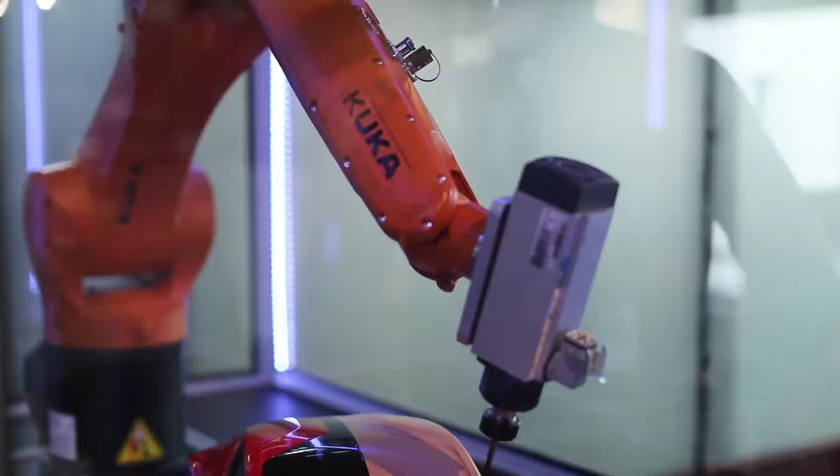Almost all design and construction nowadays is digital. The application of digital design tools can bring many benefits to the development of a project. Digital tools include both machinery, for example CNC technologies, and software such as CAD, 3D visualization and BIM tools. Building information modelling is a key tool for digital design and one we will focus on in this video.

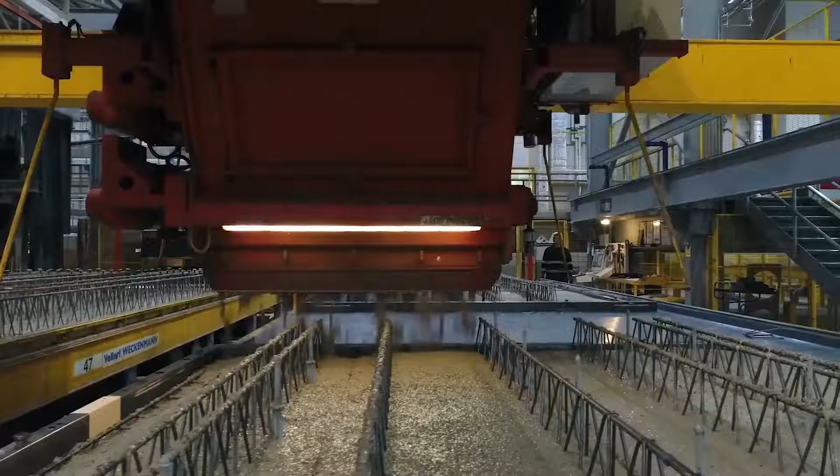Offsite offers more opportunities for integration of digital technology into the design process through CAD, CAM application. This is computer-aided design and computer-aided manufacturing. With offsite construction in the factory environment, there are a lot of opportunities to use semi-automated equipment in production. Instructions can be generated from the design model, in this way bridging the gap between design and manufacturing.

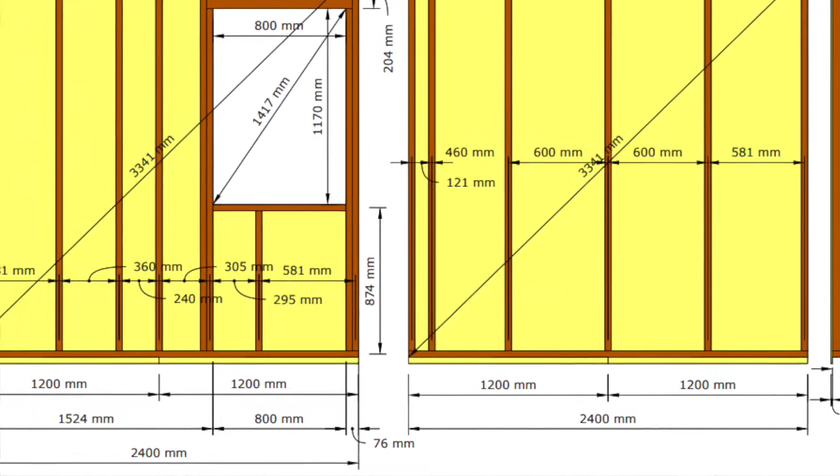The RIBA plan of work with its 8 stages is used throughout the industry in both offsite and traditional construction processes. The main difference in the design stages when designing digitally for offsite construction is the so-called early design freeze. This is the stage before manufacturing starts, when all aspects of the design need to be agreed and finalised. This can be very detailed, for example right down to the style of the kitchen cupboard handles. This is a very important change in the mindset for designers, compared to the traditional process where changes to the detailed design sometimes occur while the building is in construction.

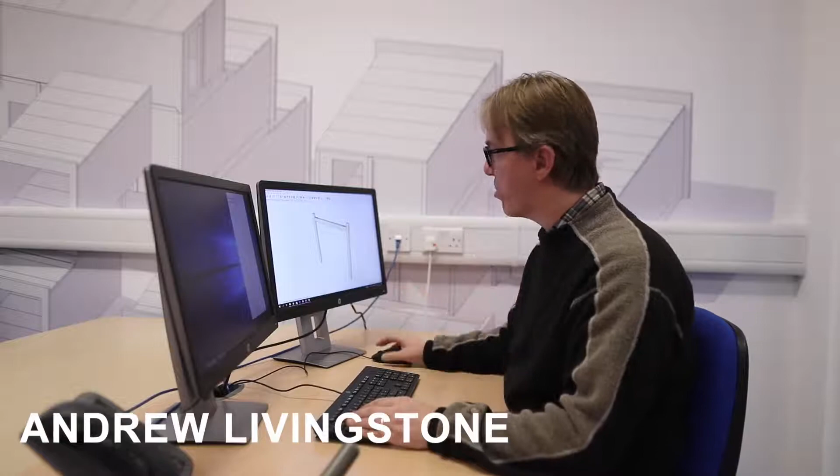This is an example of a parametric component. I select the object and I have the ability to change numerous facets about this. This is currently showing a beam and post. Now my beam is at a lower position. If I want to have the beam at a higher position, I can simply select that, press apply, or I can change any other characteristic about this part.

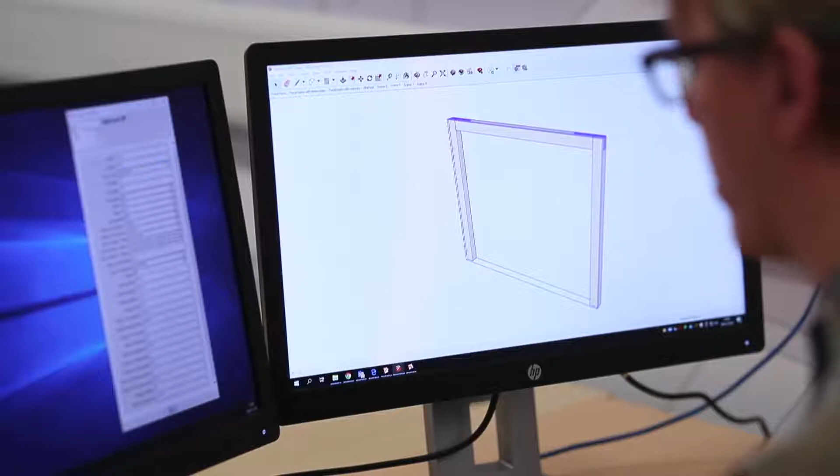Or if this component wishes to be a racking wall made from cross-laminated timber, I can simply select that. Or if this wall wanted to be a component made from timber frame, I can simply select that, press apply, and there's a timber frame there.

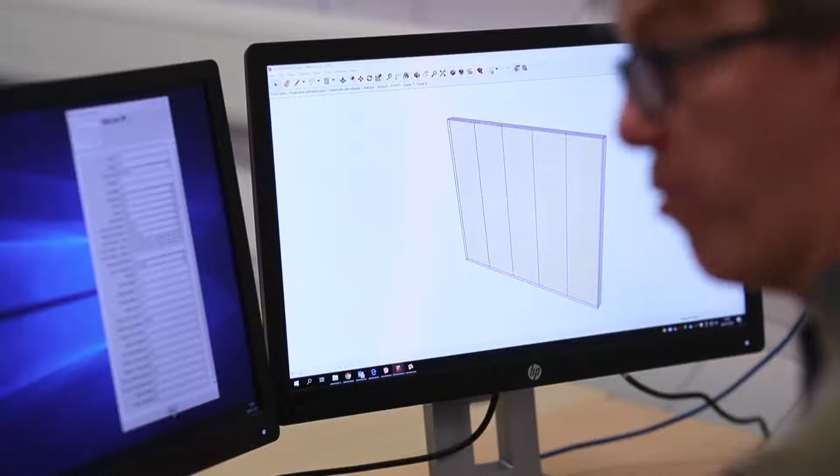If I go back to the racking wall made out of CLT for just now, and if I wish to add a window within here, I can add a window or a door or any form of opening. I can then specify the height, sizes and location of this opening. For example, if embodied carbon data is provided for each of the materials contained in the model, designers can manipulate the building's embodied carbon footprint with relative ease. We can look at the BIM model using the layout tool.

Anything that's changed within the original model instantly and automatically gets updated within the layout, so we've got one source of true information.

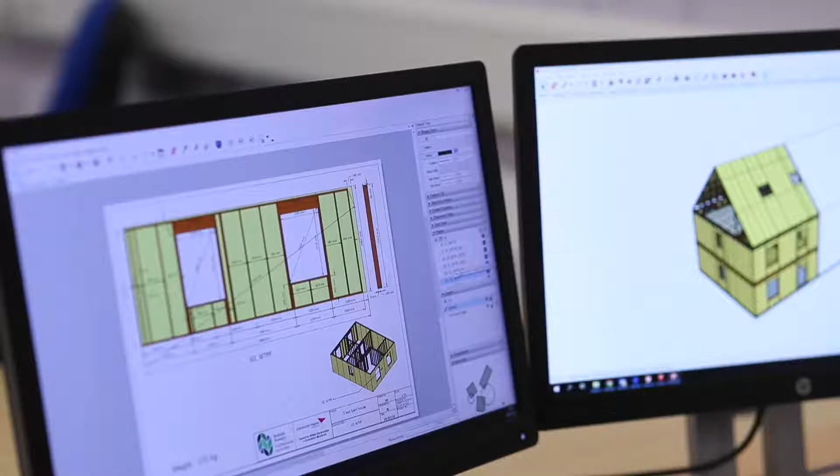This one BIM model creates the entire cutting and manufacturing drawings. There's examples here: we've got a panelized drawing, and above it we've got all the weights and the global warming potential for this.

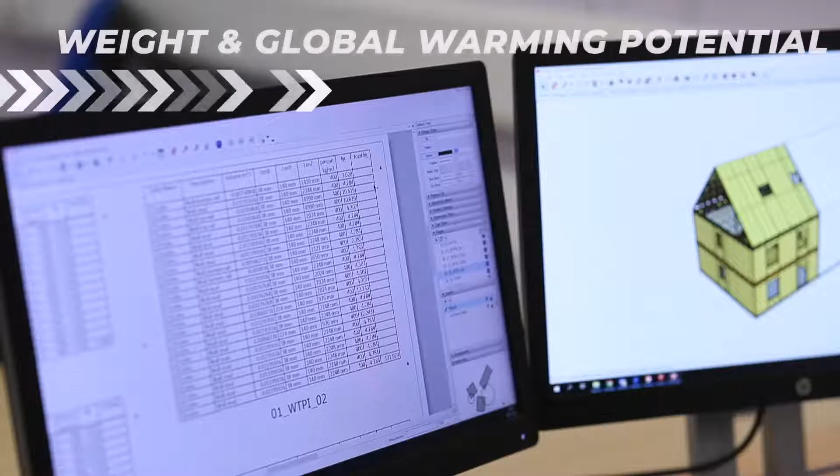If I zoom into one, you can see the cutting list for that one panel. So on the summary for this project, we can calculate exactly how much material of what type was used, and within that we've already captured the global warming potential for this.

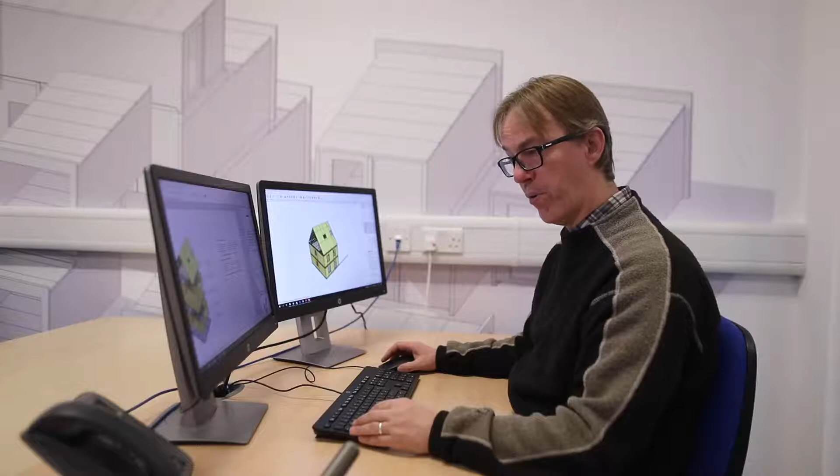So for this project here, we have the summary output categorizing that, and also your full cutting list and order list for the project. The same goes for time and cost analysis with 4D and 5D BIM simulations, which add additional dimensions to the traditional 2D and 3D models.

The application of digital design in offsite and BIM can also have its challenges. In the digital design market, there are large, ever-increasing numbers of software programs and associated file formats. Even within one organisation, you will often find that different people have different preferences for the tools they use and how they use them.

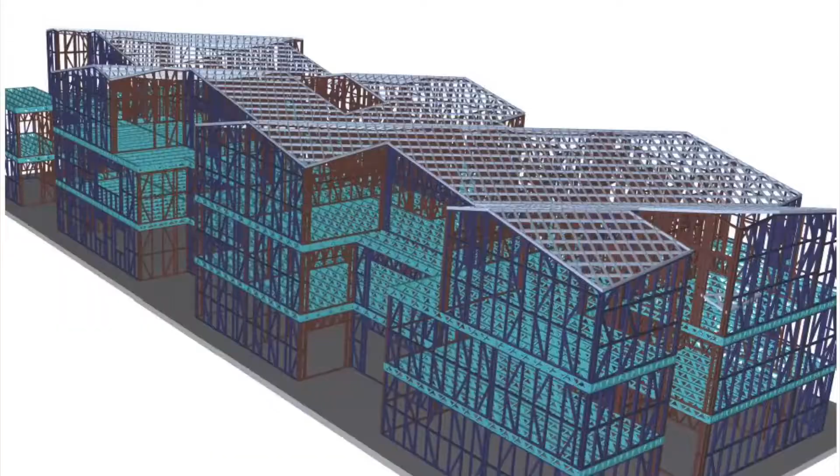Thinking of a typical large-scale residential development, there will be many project partners, each with different software conventions. The interoperability of these tools and their naming formats are often so complex that a specialist BIM manager is sometimes employed to decide and maintain the necessary file formats and version control across different software packages.

Often the models from different partners are overlaid in one single model using the Industry Foundation Class, or IFC, file format. The application of BIM tools for offsite construction is often very exciting, as new developments keep on emerging in the market.

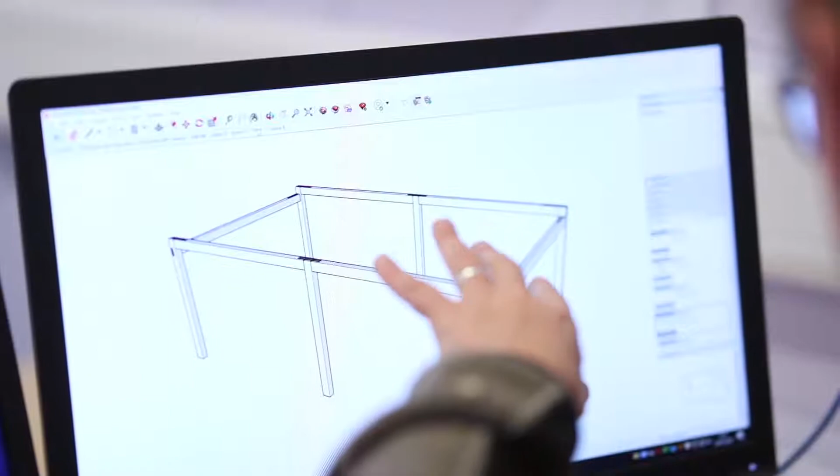Today we are filming at the Trimble Technology Lab at Napier, and we will show you a few tools including SketchUp Pro, Tekla Structures, a drone and a scanner. This is only a snapshot of the technology available at the moment.

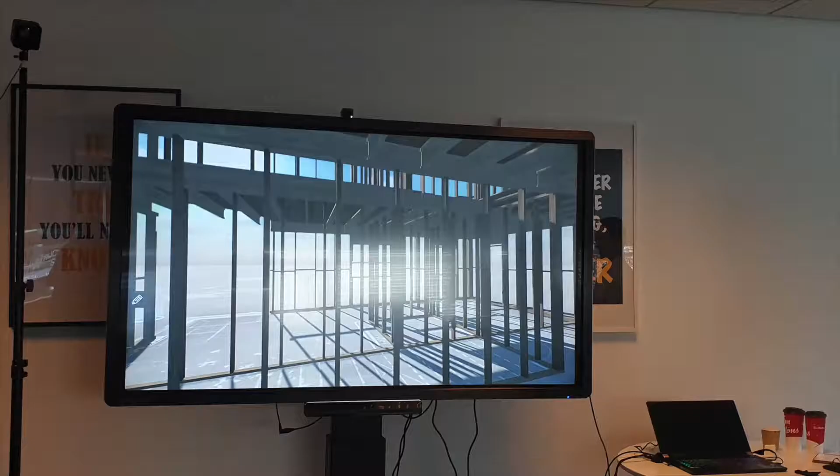With future developments, we expect to see increased usage of virtual reality and augmented reality design for offsite construction projects. With virtual reality, we can develop more interactive training courses, such as in the Convert project, where an offsite timber frame single-family home can be constructed by students and learners at all levels.

Similar virtual learning environments can be created for the on-site assembly of offsite systems, thus providing health and safety training to cover any risks. Augmented reality, where the data-rich BIM model is overlaid on top of the actual reality, offers even greater opportunities for the use of digitisation during manufacturing and construction.

One of the immediate applications of augmented reality can be within quality control, as designed and as-constructed versions of the model can be directly overlaid to identify any differences and correct them before handover to the client.

In summary, the application of digital design tools in offsite manufacturing is enhanced through CAD/CAM design processes. One of the main differences to be aware of in offsite construction is the early design freeze compared to traditional construction. In this, BIM tools with 4D time and 5D cost analysis can be used to predict and optimise the performance of a project during construction.

A challenge in this process can be the vast array of tools available with different file extensions. A solution to this is often the Industry Foundation Class, IFC, file type. In the near future, we are likely to see increased use of virtual reality and augmented reality for training, design development and quality control. Congratulations, you are now offsite ready with knowledge for change in digital design.

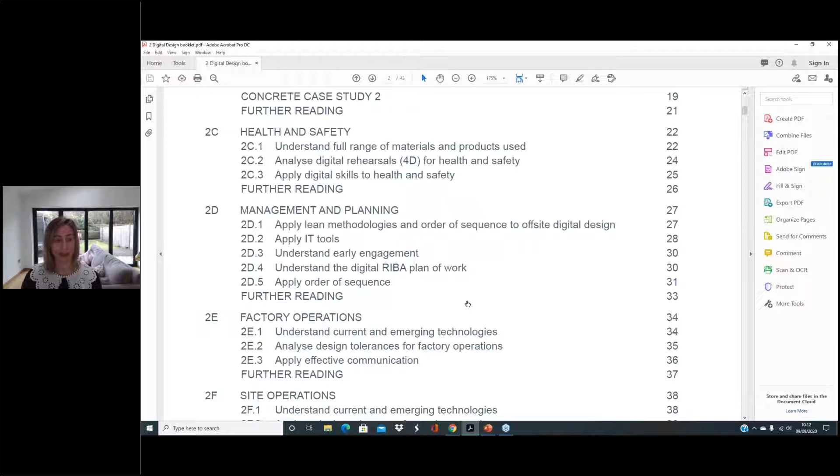So within each module, there's content there that would be able to align with digital design or estimating and commercial. So if you want to explain to your class maybe the relationship between RIBA plan of works and digital design, you can simply access the content there, and you can also access the content on the PowerPoint. So if you were explaining to the students something about understanding relevant codes and standards, you could edit just that PowerPoint and use that section for your teaching and learning.

Also, just another thing I want to cover on the website, which we'll look at later on in the overview, but we had a summer student challenge over the past 12 weeks during the summer, which City of Glasgow College students and Napier University students took part in, which was a design project, and you'll hear a little bit more about it, but the website's just recently been updated. I just wanted to draw your attention to both teams. So we had 2 teams, a group of mixed students, and we'll talk about it later, but their presentations are now uploaded here on the website.

They did a live webinar to mentors and industry experts presenting their work. So really check this out, but we'll cover that in a little bit later.

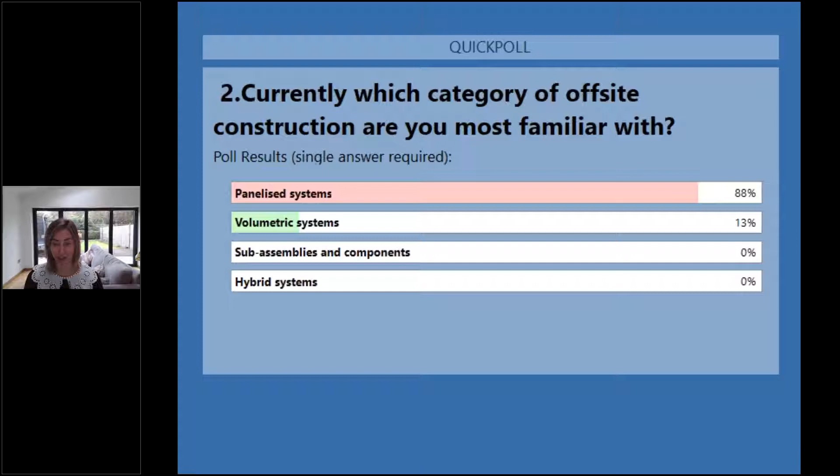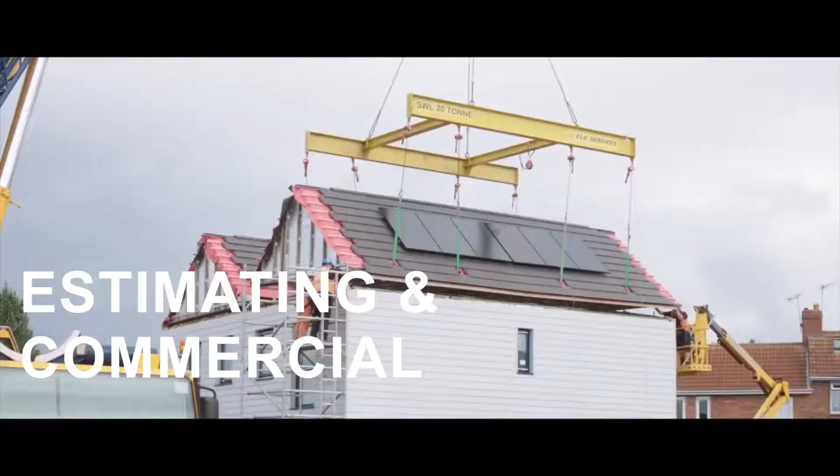And we're just going to now move on to estimating and commercial. Every construction project has a commercial and business operations side. Indeed, this module on estimating and commercial can be considered the backbone of any offsite enterprise, regardless of scale and location. Similar to the other Offsite Ready videos, we will cover some main differences between offsite and on-site construction, benefits and challenges for offsite construction, followed by applications and future opportunities.

So here we go. The main difference between offsite and on-site construction when it comes to commercial process lies in the decision-making process of the procurement stage. I spoke on this topic with Anne Bentley, Global Board Director at Rider Levett Bucknall in London, to get to the bottom of what the differences are in the real world.

With the traditional procurement model, the design typically progresses past planning approval without regards for the construction method. After the project goes to tender, contractors offer different construction methods to achieve the design at various costs. With offsite construction, the decision that a part of the building process will be transferred to a factory environment needs to be taken much sooner, ideally in the initial strategic definition stage.

In this way, the design can be informed by the dimensional limitations of the selected offsite construction system. Transport regulations, for example, which we'll cover in more detail in the logistics video, can influence the standard width, height and length of the offsite system.

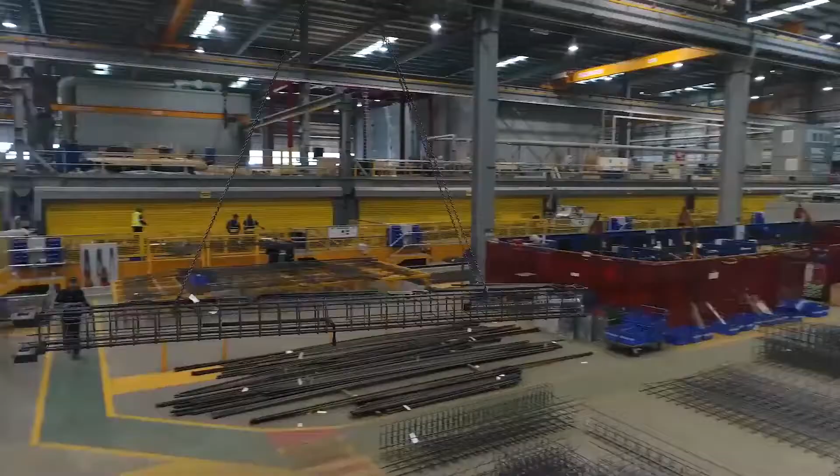Offsite construction offers several estimating and commercial benefits. One of the leading benefits recognized by clients is reliability in resources management. With increased control over materials and labor costs in the factory, the client can have higher certainty that the first cost figure they're presented with will also be the actual sum to be paid for the manufacturing parts of the project.

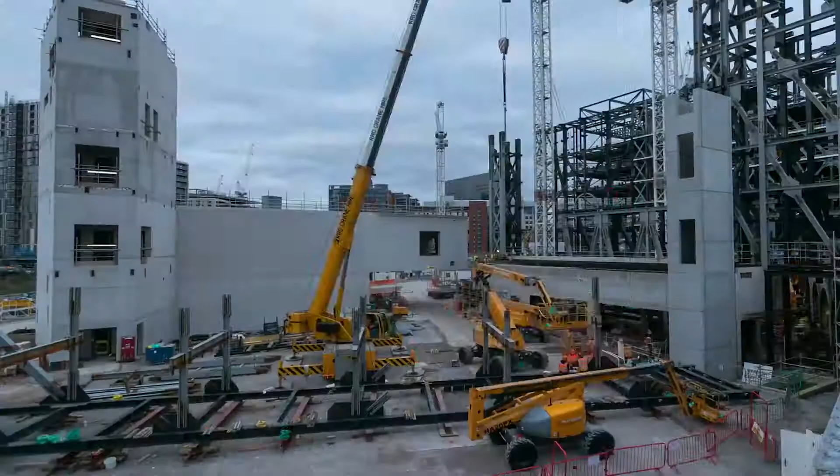Afterwards, in the construction stage, the rapid component-based installation of offsite systems can ensure that the project is also delivered on time. As we all know, time is money, and this is especially true on a building site where increased time means increased staff, plant, permits and loan costs. In this way, with predictable and often reduced construction times, offsite systems offer the advantage of more reliable cost estimations.

Unfortunately, offsite construction also has some challenges, especially in the level of required upfront capital investment in manufacturing facilities. At Ilke Homes in Yorkshire, for example, funding of more than £30 million was required to set up and scale up the factory to its current production of approximately 2,000 homes per year.

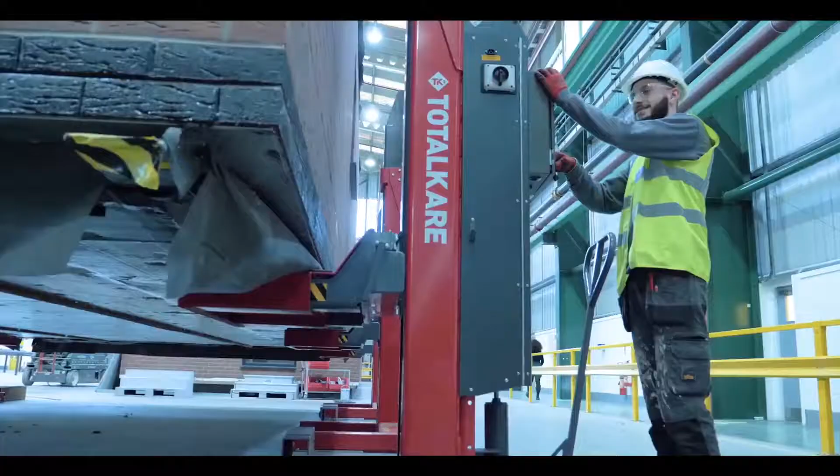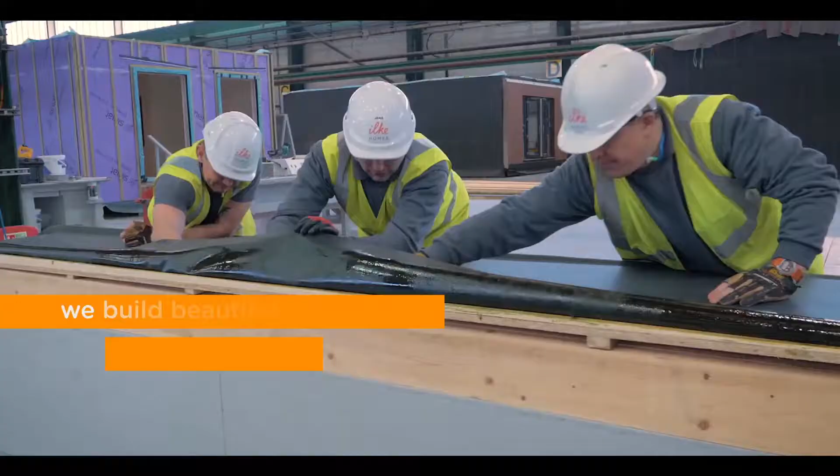With a fragmented construction industry with many micro, small and medium enterprises, an investment of this scale is not to be underestimated. The level of upfront investment will depend on the size of the factory and its level of automation. Often businesses start production with manual processes, and after some income is generated and built up, they invest it in gradually purchasing equipment and skills training.

Another often encountered financial issue in offsite construction is cash flow. In the factory environment, all materials for the given project need to be procured in time for start of manufacturing with their relative lead-in times. This can mean everything from structural materials such as steel, timber or concrete to the light bulbs and washing machines. This is why staged payments are often requested by the manufacturer to alleviate some of the pressure of having to spend company resources on labor, plant and materials upfront.

Understandably, the staged payments at set intervals can make the clients apprehensive, as they are providing payment before the project is completed.

In practice, estimating for offsite construction in comparison to on-site construction can be challenging. If you don't have experience in estimating for offsite materials, plant and labor, it can be difficult to find accurate information in the standard databases and books.

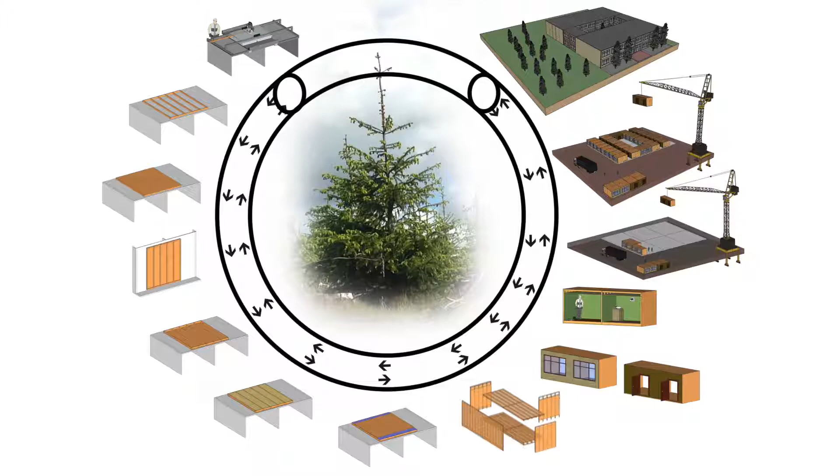These are exactly the types of advances we expect to see in the future on estimating and commercial work for offsite construction. What we may also see is increased use of design for manufacture and assembly plus disassembly, or DFMA plus D for short. This takes into consideration the reuse or refurbishment of some of the offsite components. Use of DFMA plus D can form an even more comprehensive and more sustainable picture of the building's whole life cycle costs.

Another future opportunity to help drive more use of offsite in the construction industry is the development of more collaborative procurement models.

In summary, estimating and commercial activities are a key aspect to guarantee the success of an offsite project. The early engagement of all partners in the supply chain is fundamental in offsite construction projects. If the offsite manufacturer is involved early, costs for the manufacturing and on-site construction can be predictable for the client.

Some challenges are, however, the upfront investment and accurate comparison to other building systems. In application, offsite construction can offer a better understanding of the whole life cycle costs. In the next few years, we expect to see this develop further alongside more collaborative procurement models.

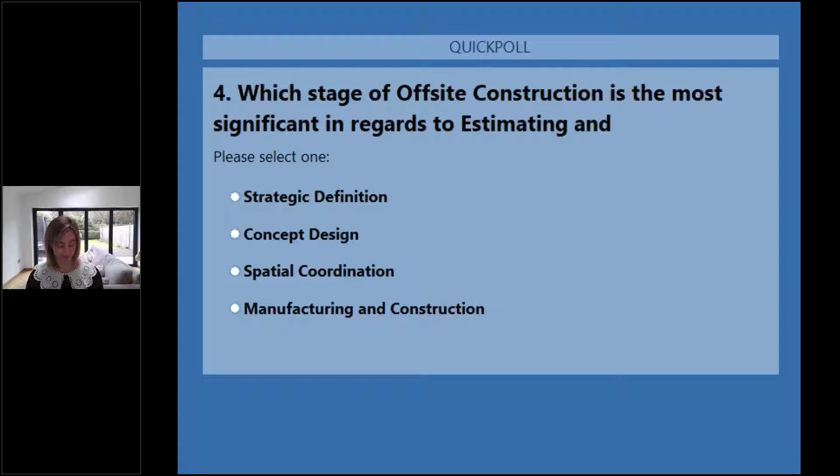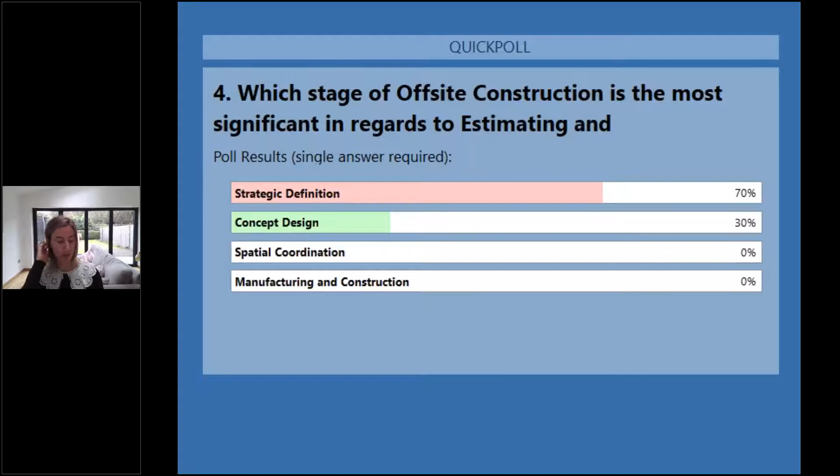Strategic definition, yep, definitely coming in as the top for the most significant in regards to estimating commercial. So I think everything's coming around this early engagement and planning, and it leads on to our question from one of the participants: if early collaboration is important, where do you get the support to move towards using offsite practices? I think that's a really important question, and it has many ways to look at it.

First of all, when we're trying to adopt offsite construction, trying to bring it in at an early stage is one of the key things, so into education, so it becomes part of the formal education within the construction industry. One step is utilising the content so that people moving into construction or into work have knowledge of offsite construction.

Also, Scotland have OSS, Offsite Solutions Scotland, a collaboration of people working in offsite construction and working with education, where they're getting together sharing ideas, sharing good practice, and working with education and people like Dr. Mila Duncheva and Robert Hairstans at Napier University. It's supported by people such as Matt Stevenson, formerly a founder of Carbon Dynamic, and Robertson Timber Engineering, and Neil Sutherland as well from MAKAR - people working in the industry currently in offsite construction.

So I think this is a great place to start to get advice if you're thinking of moving into the sector or wanting to adopt your methods of construction and manufacturing into offsite construction.

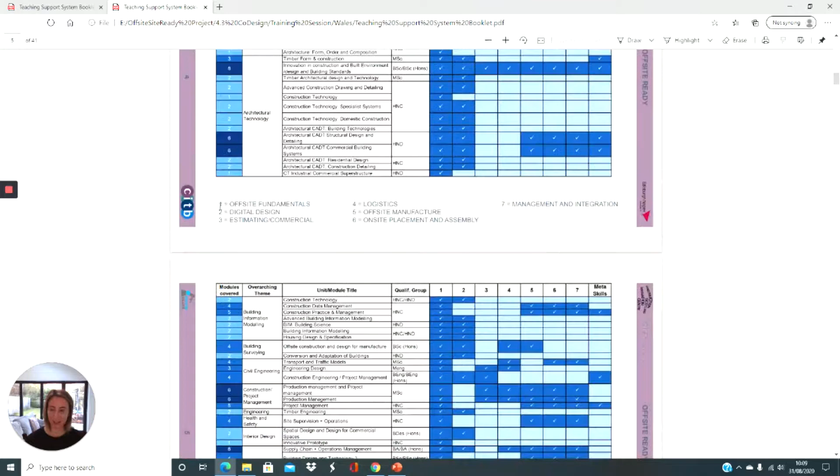So for example, if you were looking at delivering modern methods of construction an introduction, offsite fundamentals and meta skills would be recommended for you to use in your teaching and learning. There's a key at the bottom, numbered 1 to 7, which is referenced along the top of the page. Again, if you are teaching domestic construction, you should focus on digital design and Offsite Ready fundamentals.

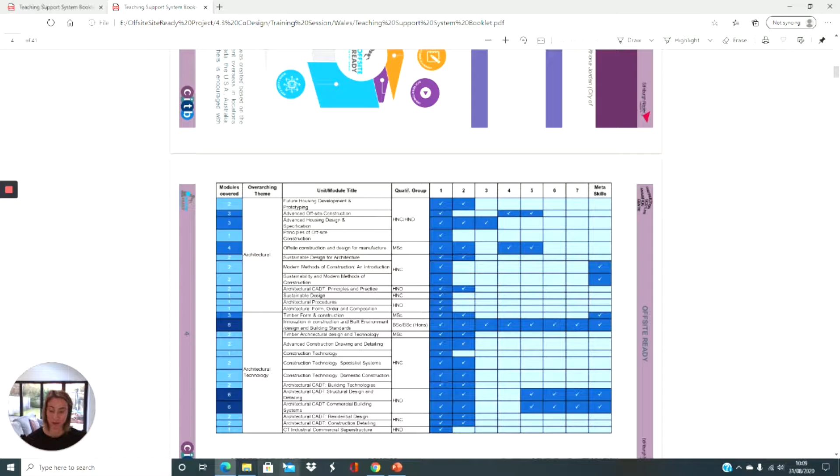If we go back to our website, the teaching material can be downloaded from the website, training materials, and we have the 7 modules here. If I click on digital design, for example, and scroll through, you're presented with animations, a module descriptor, a slide deck which can be downloaded and edited, PowerPoint, downloadable infographics, an overview video of the whole subject area, teaching booklets for the whole project.

If we go back to our teaching support pack and scroll to section 6, there are suggested delivery methods here. The content's suggested delivery is broken down into 3 levels: an introduction level, a medium level, and an advanced level. This would guide you through suggested delivery options.

So if you were delivering, say, fundamentals at an introduction level, maybe a national certificate level, it would be recommended that you give 1 lecture with a site visit or a factory visit, a small design project, a feedback session on the design, and an interactive workshop. We will look at how the content can be adapted into a project through the Offsite Student Summer Challenge in a moment.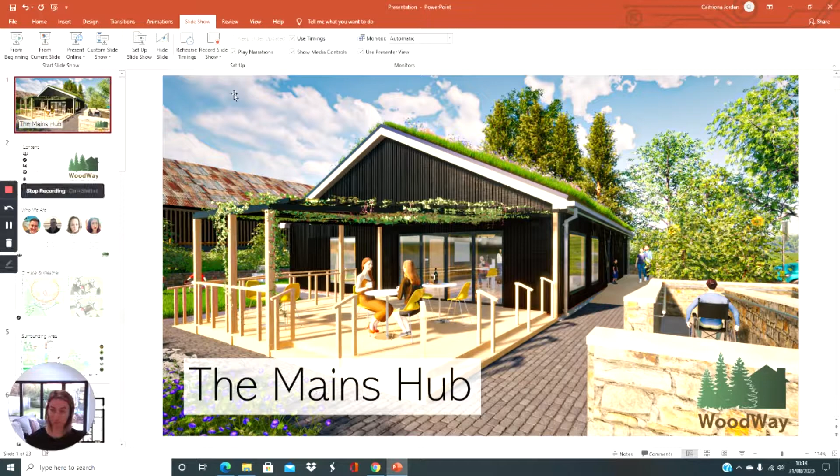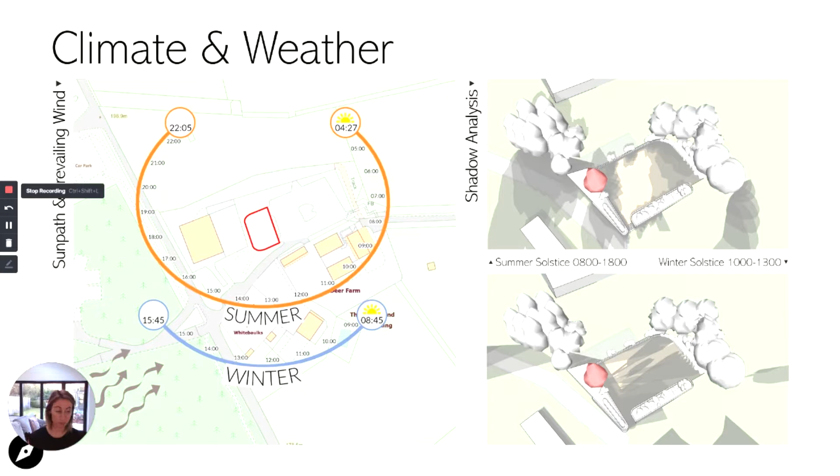I'll just go through some of this. Once both teams presented their projects live, a poll was then taken, and the panelists and judges provided their vote. The winning team was then announced live. Sweco, one of the project mentors, had generously donated a cash prize for both teams, obviously for the winning team slightly more.

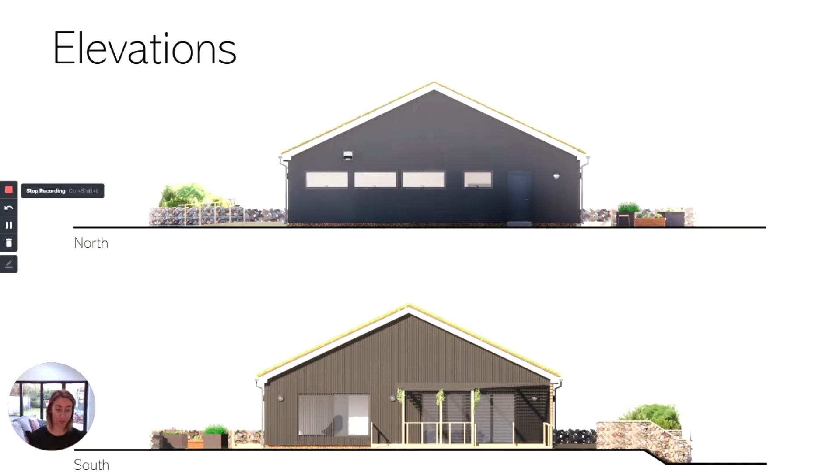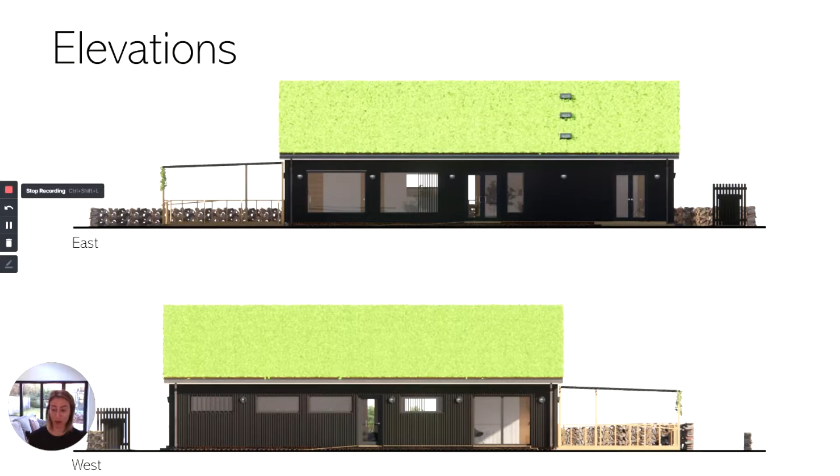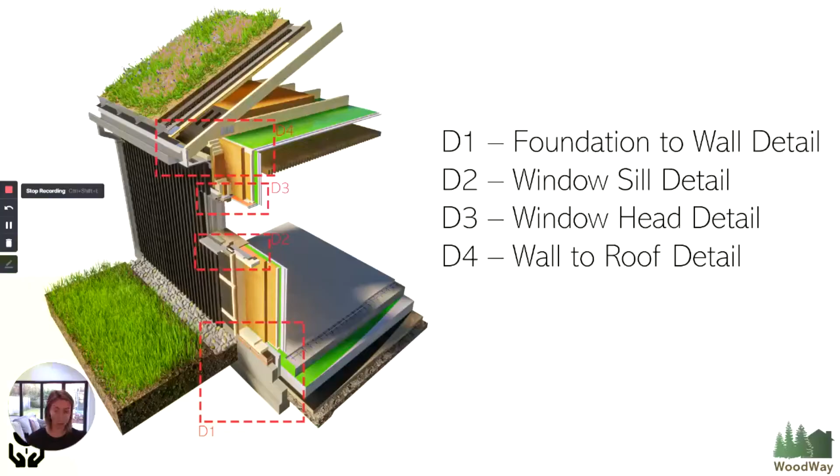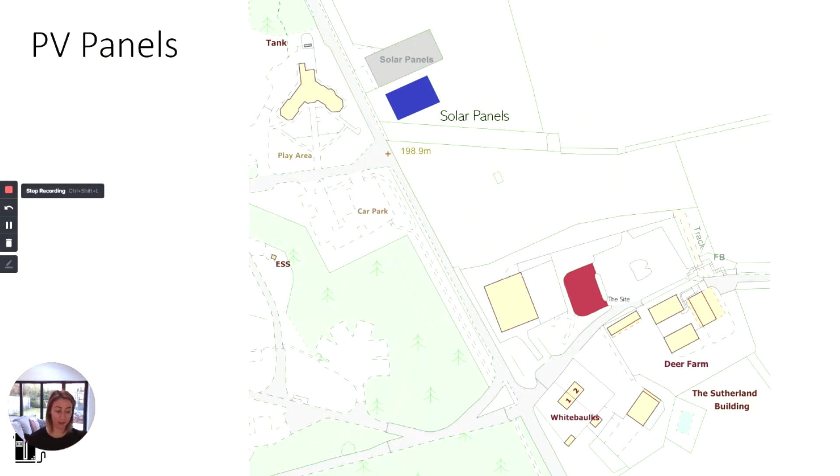This project has been a success due to the organisation of the project from Louise Rogers and Dr. Mila Dincheva, all mentors, but most importantly the students. These students were from different courses, different universities and colleges at different levels, and they all worked together to produce what I'm running through just now, which you must admit looks fantastic. They worked together virtually, having never met each other in person, and I think their outputs speak for themselves.

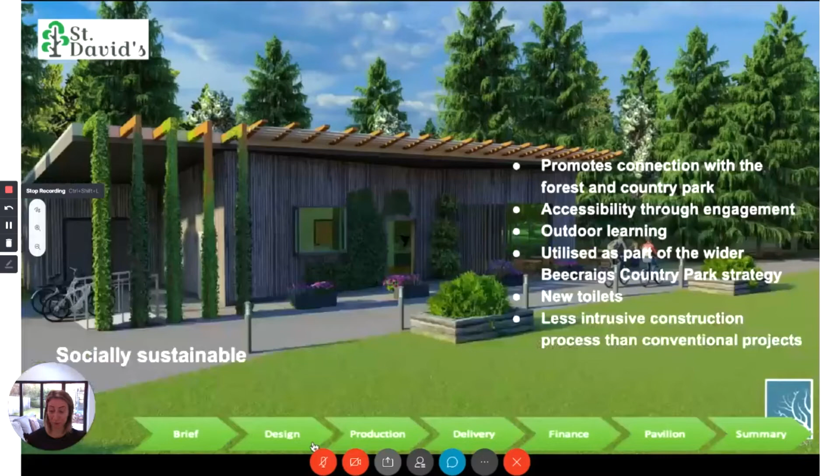The project shows that educators like yourselves can deliver something similar over the next few months, and I know I'm intending to do this. I hope you found this helpful. Any questions, please ask me, and everything that I've run through today can be downloaded from the website, our Offsite Ready website. Thank you.

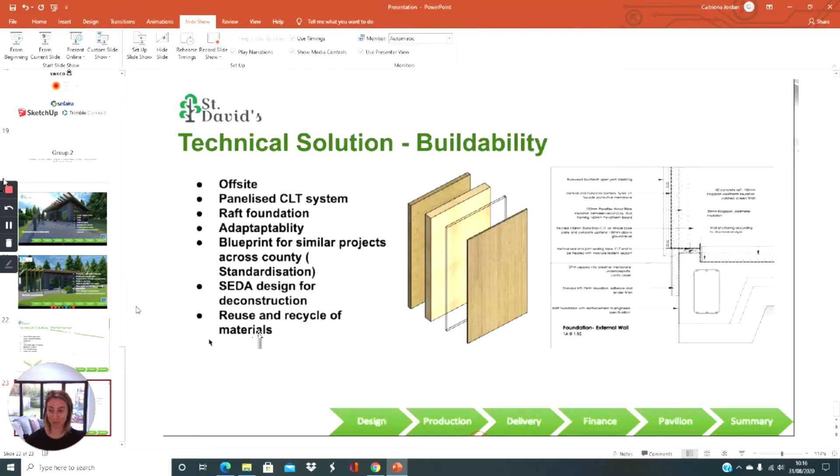We had a question that came at the end of the last question session which I missed, and it was just in regards to the social profit calculator. Is it freely available? What we'll do is I'll speak to Jamie, and if it is, I'll send you a direct link to it, which I think is a great idea. It'd be great to use for the students as well.